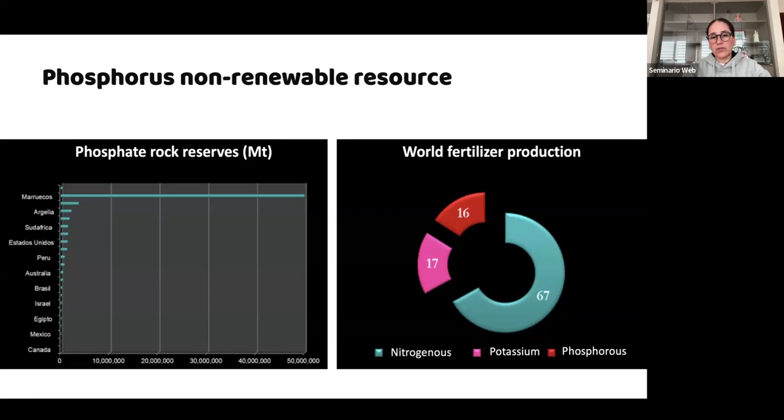2030 onwards. In the near future, once phosphorus reserves are exhausted, the only alternative left for living beings to continue to supply themselves with this element will be through its natural recycling. We can recover more than 90% of the phosphorus contained in human urine by implementing technologies that prevent phosphorus from being diluted in water. Ecological sanitation technologies, EcoSan, to recover phosphorus.

NPK is a term that refers to the three fundamental elements in fertilizer: nitrogen, phosphorus, and potassium. Phosphorus is essential for photosynthesis, respiration, and energy storage and transfer. It also helps plants flower and increases their resistance to diseases. Nitrogen is responsible for encouraging the growth of the plant's leaves and stems. A high nitrogen content results in vigorous growth, especially in early plant development.

And potassium is key to water regulation within the plant. It helps the plant resist drought and diseases, improve its flavor and color, and is vital for the production of proteins and sugar. Therefore, the presence of these elements in manures and fertilizers can significantly impact the growth and development of the plants.

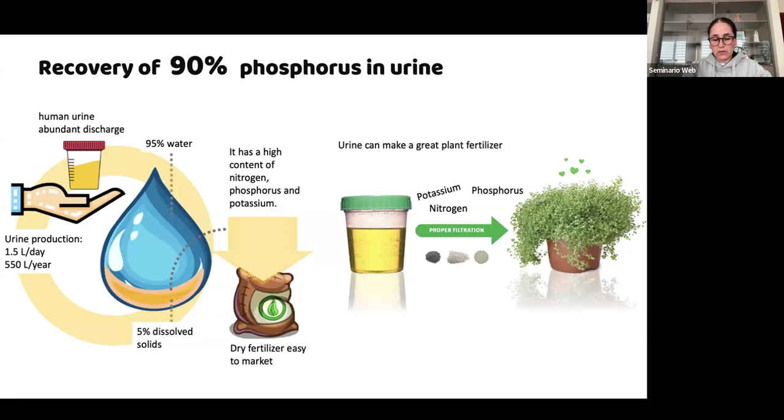In order to achieve greater sanitation coverage in peri-urban areas, dispersed areas, complicated topography, it was necessary for the Public Social Water and Sanitation Company, EPSAS, to visualize alternative sanitation solutions and develop capacities to offer solutions. Decentralized sanitation solutions such as septic tanks, dry ecological toilets, decentralized wastewater treatment plants, or fecal sludge treatment plants. They are also sustainable by having a scheduled sludge collection service and its adequate treatment and final disposal.

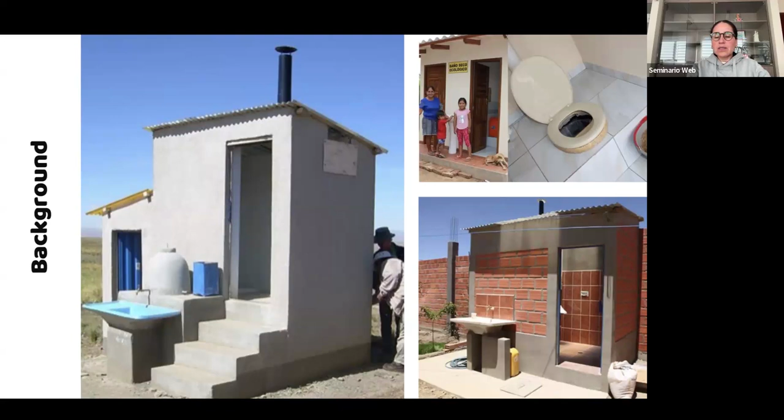The intervention considered a sustainable model with the participation of the Swedish Embassy as financier, Agua Tuya as responsible for the implementation and training in the solution, the Public Social Water and Sanitation Company, EPSAS, as responsible for the service, and the beneficiaries from the El Alto Plateau have access to safe sanitation, and through the services we recover their nutrients.

The actions. A collection and transportation service for feces and urine from ecological toilets was implemented, ensuring continuity and sustainability. An adequate treatment system for urine and fecal sludge from dry ecological toilets was implemented. Train EPSAS technical staff in the operation and maintenance of the feces and urine treatment plant. Communicate to the population the actions to improve sanitation services by EPSAS with a green company approach.

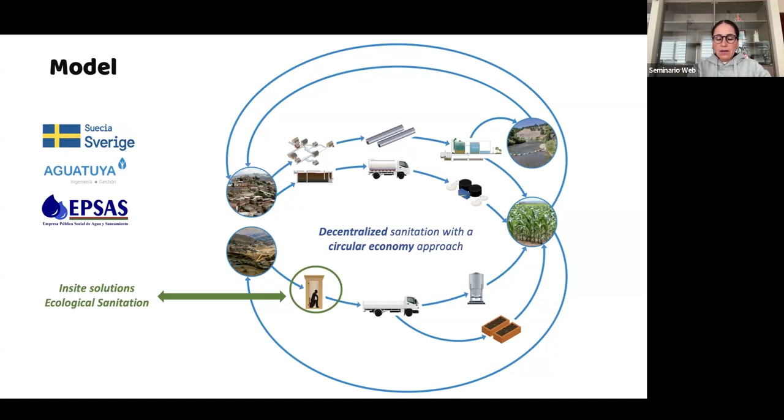Service continuity is generated through sustainability throughout the sanitation service chain. The first link in the chain plays a key role, which is why it is important to schedule and comply with established times and dates. Information and communication to beneficiaries is important to avoid failures in the delivery and collection of generated waste.

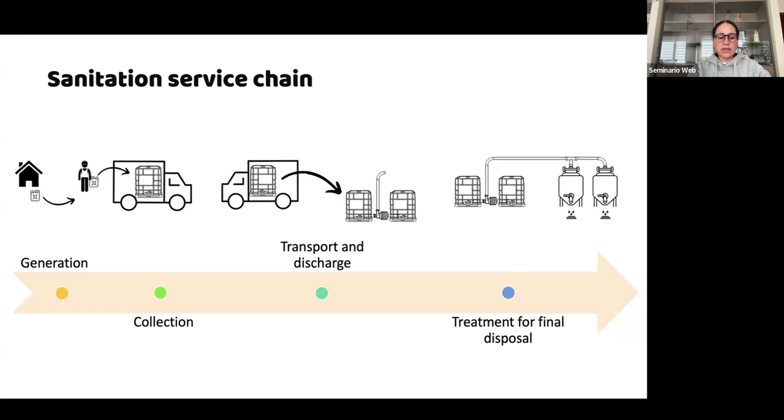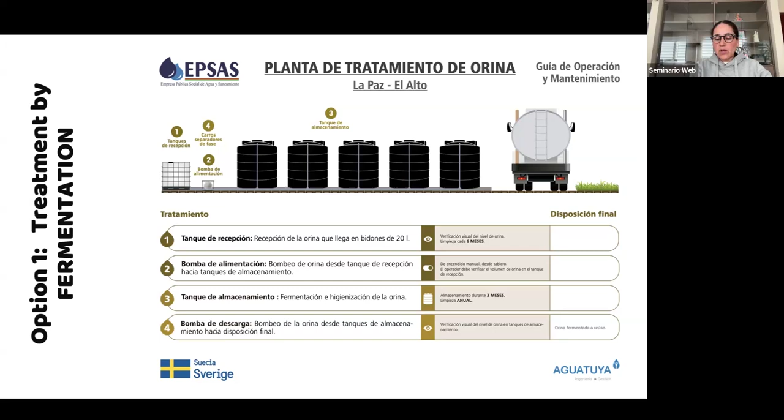Disadvantages of this option: the storage and treatment process cost, liquid transport costs, unpleasant odors during storage or application, rapid decomposition and additional treatment to maintain efficiency, risk of inaccurate application, overcoming preconceived ideas about the use of urine fertilizers, and the rate of acceptance of the population to the consumption of food fertilized with urine.

The process of the adsorption is as follows. Storage of urine no more than 1 week to avoid loss of nitrogen, filling of tanks, preparation of the additives, struvite or bentonite mixture or zeolite, plus magnesium oxide to precipitate the struvite. Mechanical agitation for 35 minutes, emptying and resting for 2 hours, decanting to separate solid and liquid fraction, drain channel,

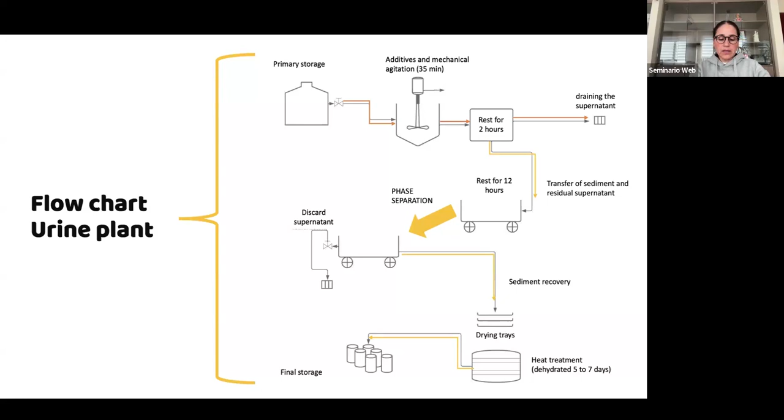drying on trays, complete drying in a solar oven for inactivation and/or sanitization of the product, raising it to more than 90 degrees Celsius for 4 hours, usable time in the Bolivian plateau. Drying time of 4 to 5 clear days and 7 to 9 cloudy days. And final storage for disposal or sale.

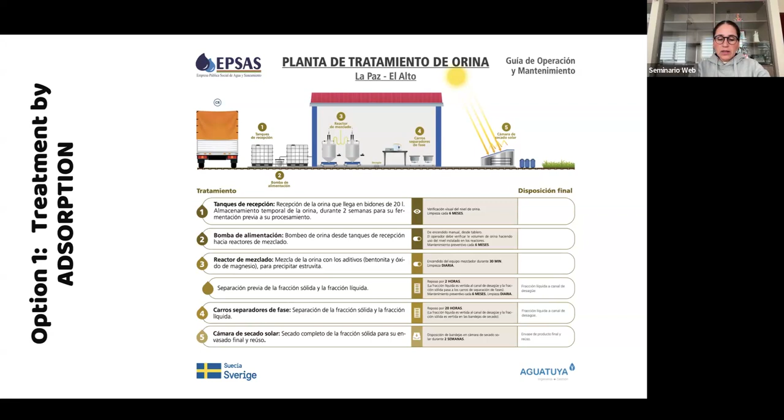The advantage of a solid urine product or fertilizer is easy storage and transportation. It takes up less space and it is easier to store and transport. Reduction of odors, making the fertilizer easier to handle and apply. Greater stability and longevity without degrading or losing effectiveness. Precision in application, ensuring the right amount for the plants. Greater acceptance by farmers and the population.

The results show an inconsistency in the analysis of potassium. However, it records an average recovery of 91% of phosphorus and 10% nitrogen. In subsequent monitoring analysis, the recommendation was to investigate laboratories that have state-of-the-art equipment for measuring nitrogen and potassium, with the aim of having more accurate results and avoiding interference or errors in the measurements.

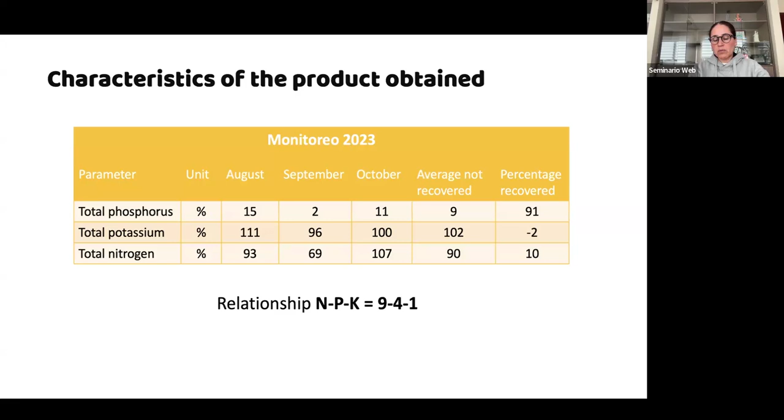The plant was put into operation in August 2023 and will only complete 1 year of operation this August. We still have monitoring studies to do to show more solid results. In any case, in the first 6 months of operation, we were able to determine that the production cost is $3 per kilogram of dry fertilizer produced. Market studies are still needed to determine how much the product obtained can be sold for. The market offers fertilizers from $0.5 to $3 per kilogram, so we are in the price range.

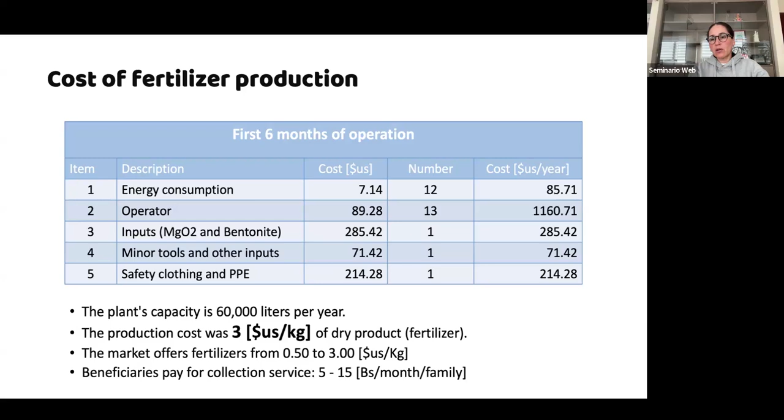But in the production of our fertilizer, it should be taken into account that it provides access to safe sanitation and also ensures the closing of the nutrient loop, generating an environmental benefit of high value that we are not seeing. The implementation of this type of model project with sustainable sanitation service throughout the chain will also close the nutrient cycles, demonstrate that this type of solution is possible and highlight the importance of the paradigm shift for humanity to live in a sustainable way on the planet.

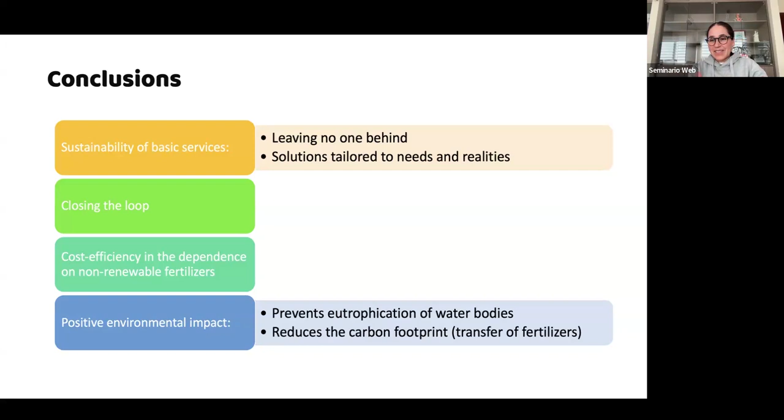So this is the end. I'm going to show you a small video so you can see the plant with your own eyes.